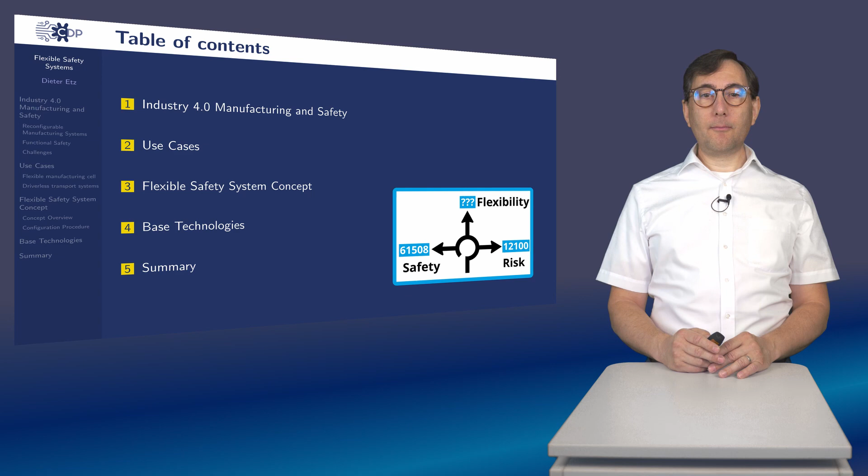Now let's have a look at Industry 4.0 manufacturing and why safety needs particular attention in this context. There are several requirements on machinery used for Industry 4.0 manufacturing. First, the idea of Industry 4.0 manufacturing is customized mass production, or lot size 1 production, which means single piece production with the cost of mass production.

Then you need a flexible change of configuration, including hardware as well as software. Also, rapid change of process and product configuration is important in order to minimize setup time.

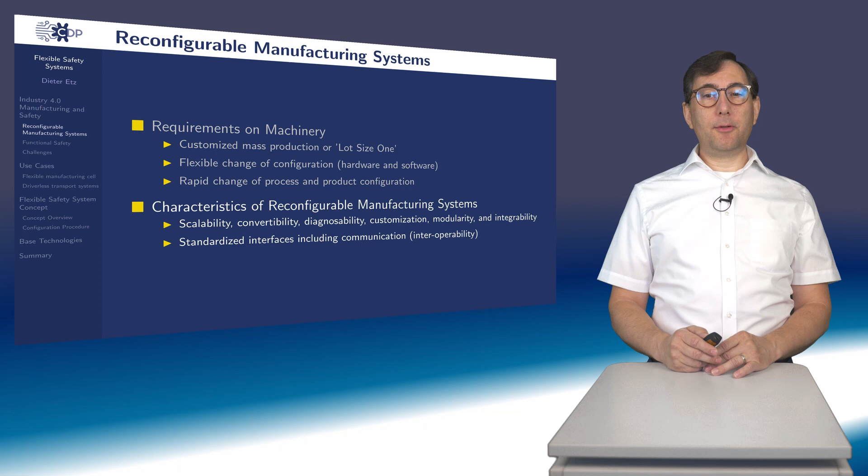Now let's come to reconfigurable manufacturing systems. This type of manufacturing system was already introduced in the 1990s, and with the emergence of Industry 4.0 manufacturing, reconfigurable manufacturing systems are experiencing a renaissance. These systems are characterized by scalability, convertibility, diagnosability, customization, modularity, and integrability.

Also, an important aspect is standardized interfaces, including communication. This addresses the need for interoperability among machinery. Now let me jump to a very different and also very important topic in industrial machinery: safety.

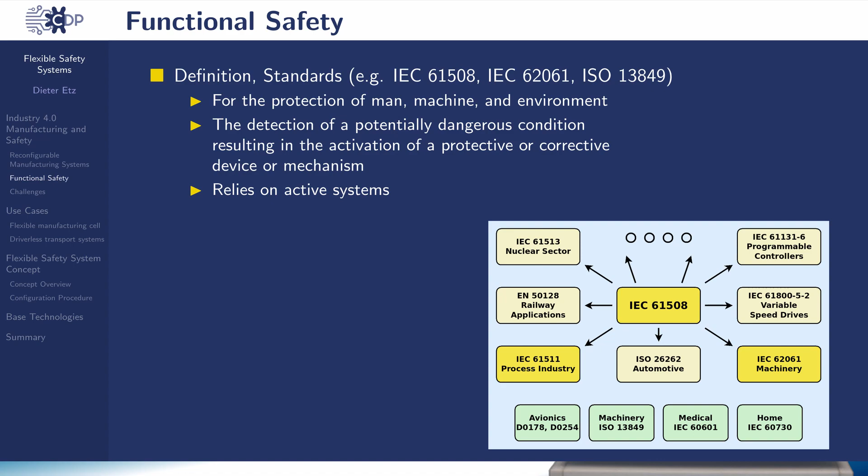There are certain standards for safety, such as IEC 61508, which is a generic base standard for other sector-specific safety standards, such as IEC 62061, which deals with machinery.

Safety is defined for the protection of man, machine, and environment. Functional safety is the detection of a potentially dangerous condition resulting in the activation of a protective or corrective device or mechanism, and it relies on an active system. It therefore differs from a passive system, such as a fence.

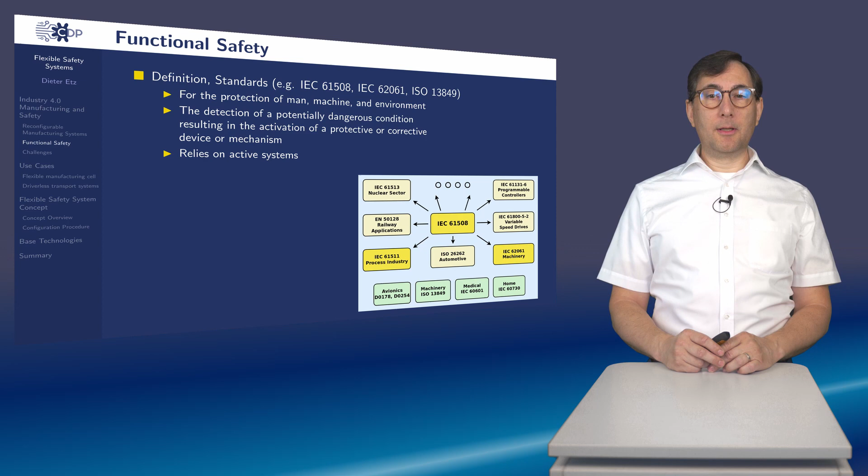There are many reasons for implementing safety measures in industrial machinery, and one of them is regulation. There are different kinds of regulation, such as administrative law. Administrative law deals with consequences without suffering any damage, and an example would be the European Union's Machinery Directive, which is in short time becoming a regulation.

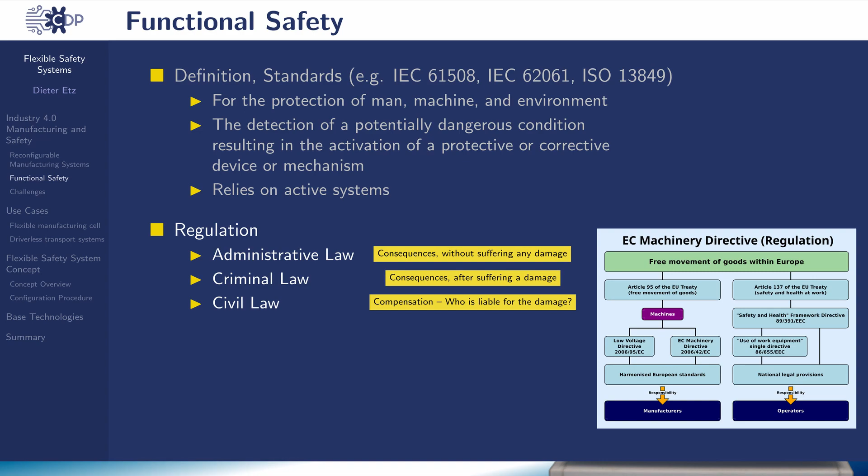This regulation defines responsibilities of the machine manufacturer and the machine operator. It means that a machine manufacturer has to design and engineer a safe machine. On the other hand, the operator of this machine has to take care of safe operation of this machinery.

Another regulation is criminal law, which deals with the consequences after suffering a damage. And there's also civil law, which deals with compensation, meaning who is actually liable for the damage.

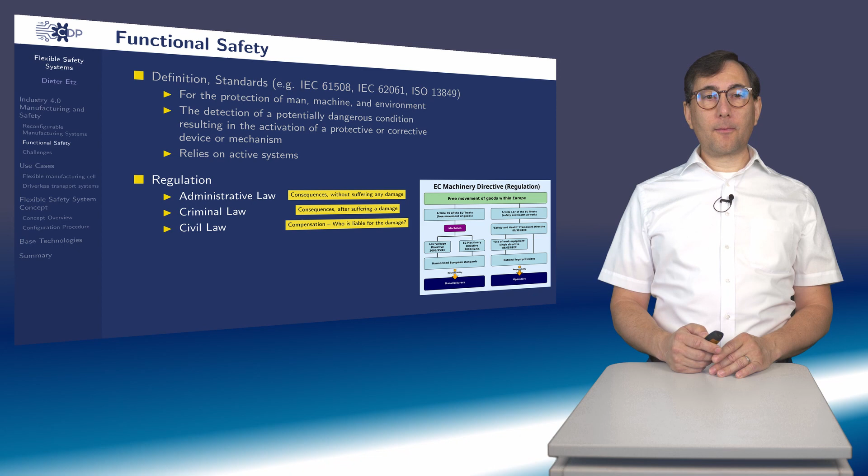Now let me come to the so-called overall safety life cycle. These life cycles are adopted by several safety standards, and they provide a systematic way of all activity necessary in order to achieve safety certification. It therefore provides a framework to achieve the required safety integrity level.

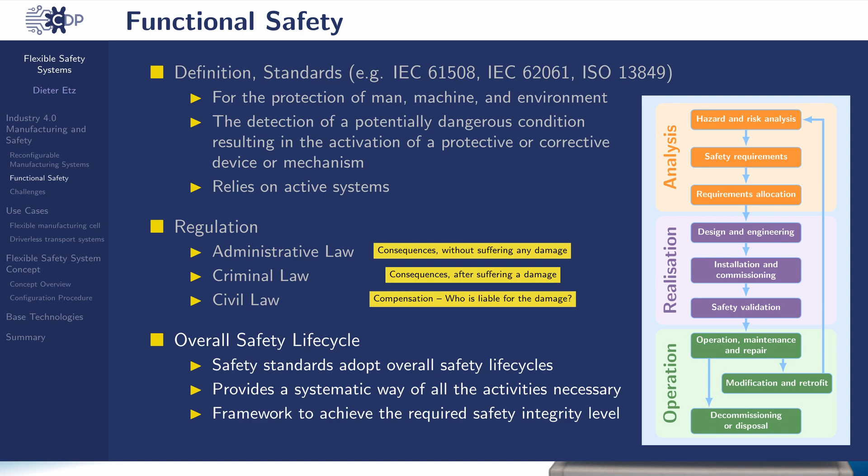This brings us to the challenges of flexible machinery in Industry 4.0 manufacturing. So what are the challenges? First of all, the reconfiguration of machinery, including the safety configuration.

The operator of the machinery wants to have quick, simple and safe reconfiguration. And this reconfiguration depends on the product or on the process. Change requests therefore can originate from a human operator as well as from an orchestration system.

Today, this reconfiguration of safety is not really existing. There is only a way that you can use an operation mode selector to switch between a number of safety configurations, but it's not as flexible as the operator wants to have it.

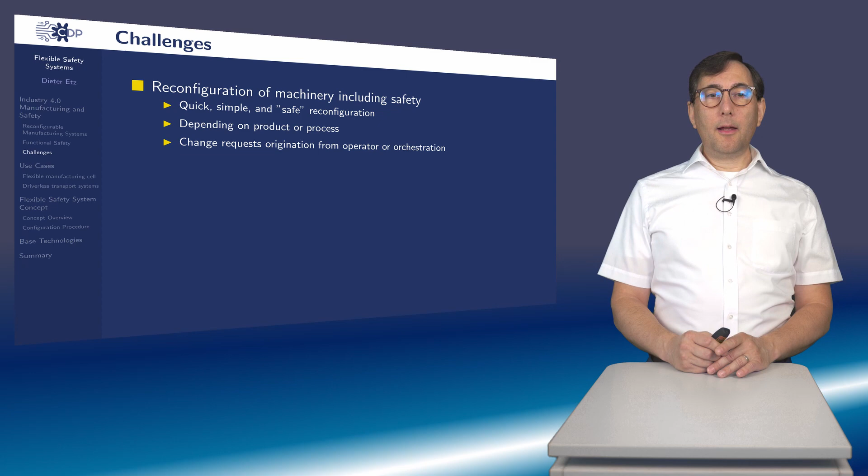Another challenge is the high degree of complexity of these many configurations. This is due to the high degree of flexibility and customization of the machinery, and also due to the rapid rearrangement of modules of machinery. This includes hardware as well as software modules, and in our case also safety devices and safety configuration. There are many layers of configuration in that context - hardware, product, process or safety - which have to be reconfigured at the same time.

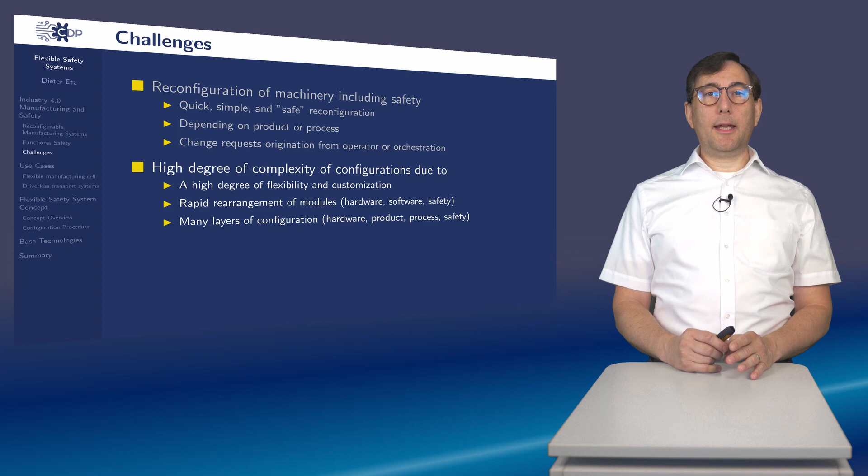Therefore, an assistance system is mandatory in order to provide rapid and safe reconfiguration for the operator. This means the operator will be enabled for quick reconfiguration even during operation, for the reduction of the operator's workload and for increased safety. Such an assistance system becomes mandatory, also to avoid careless mistakes when doing quick reconfiguration of the system.

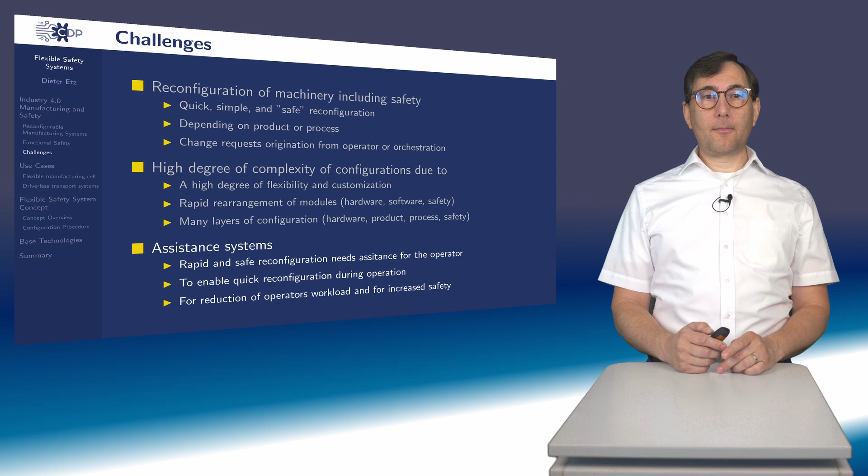So let me come now to use cases for an easier understanding of the topic. I provided two use cases which will show the need for flexibility in safety in machinery.

The first use case is a flexible manufacturing cell or a flexible manufacturing line. The purpose here is a quick and simple switching between production configurations - you have a flexible manufacturing cell, and this cell is operated in a different way depending on the shift, for example. In early shift, you're using it in a manual way. The late shift has a mixed operation mode between manual and automatic, and the night shift is running fully automatic.

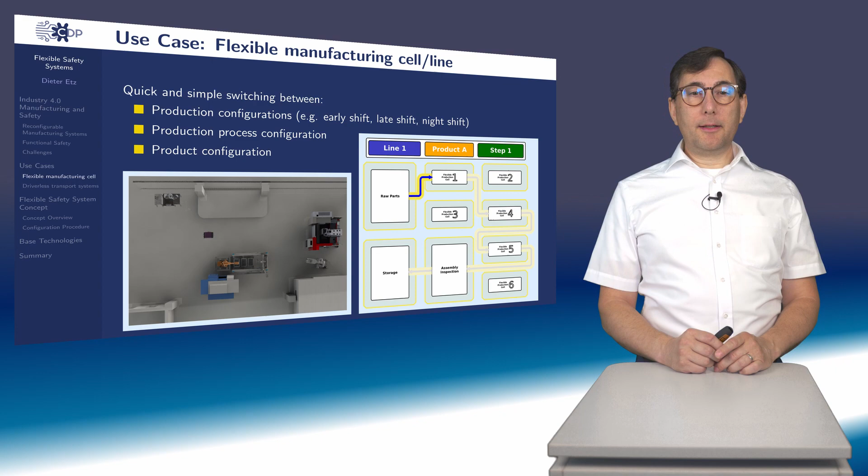There is also the need for quick and simple switching between production process configuration and product configuration. As you can see on the right graphics, in the flexible manufacturing line, which consists of many flexible manufacturing cells, the process can change due to a failure of one of the machines. This means the orchestration system can automatically switch to a different path through the line, which also includes the safety configuration.

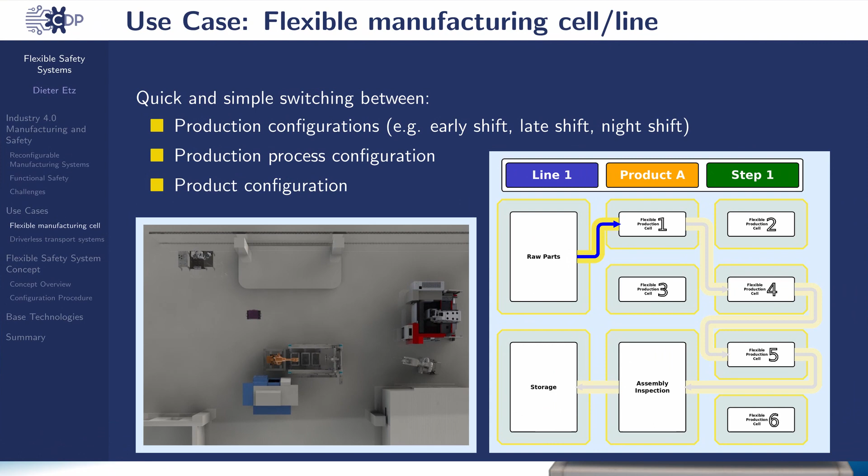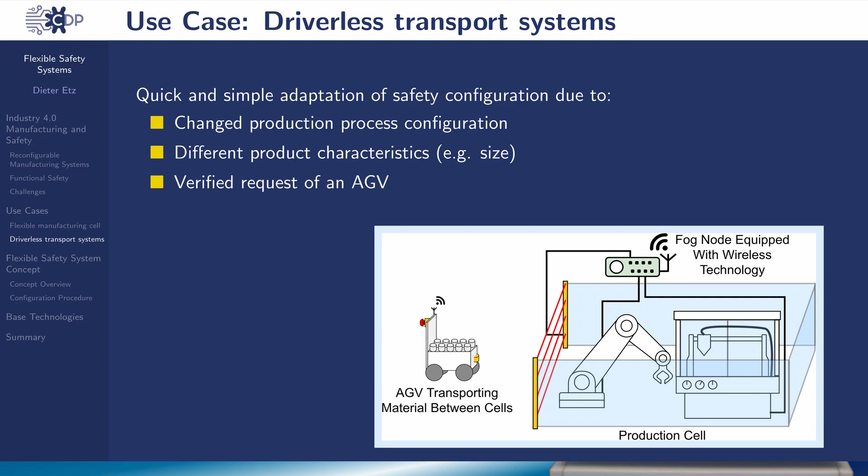The second use case is the case of a driverless transport system. In that case, quick, simple adaptation of safety configuration is necessary due to changed production process configuration, due to different product characteristics - for instance, the size of the workpiece - or through a verified request of an automated guided vehicle.

In the graphics, you can see an automated guided vehicle which arrives at a production cell, which is protected by a light fence. After a request from the AGV to the production cell, this light fence is opened up for the AGV in order to pass into the production cell. After passing through, the light fence is activated again.

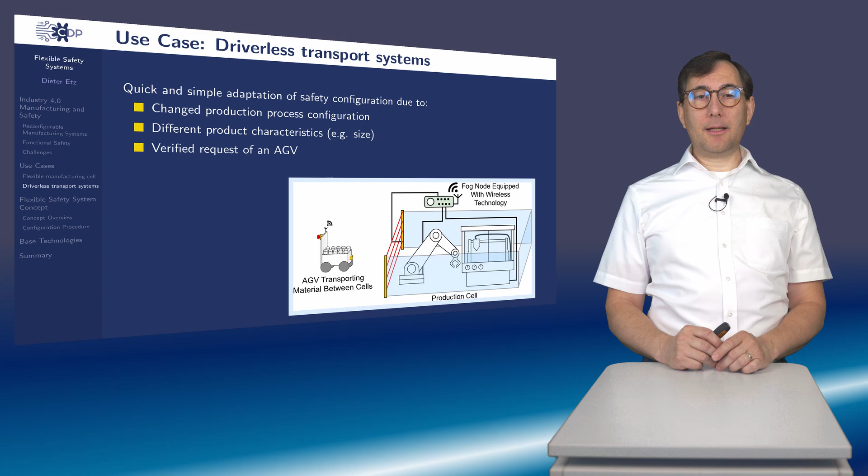Now let me come to the concepts and the idea of flexible safety systems and why this flexible safety system is important for the just mentioned use cases. First, let me give you a concept overview.

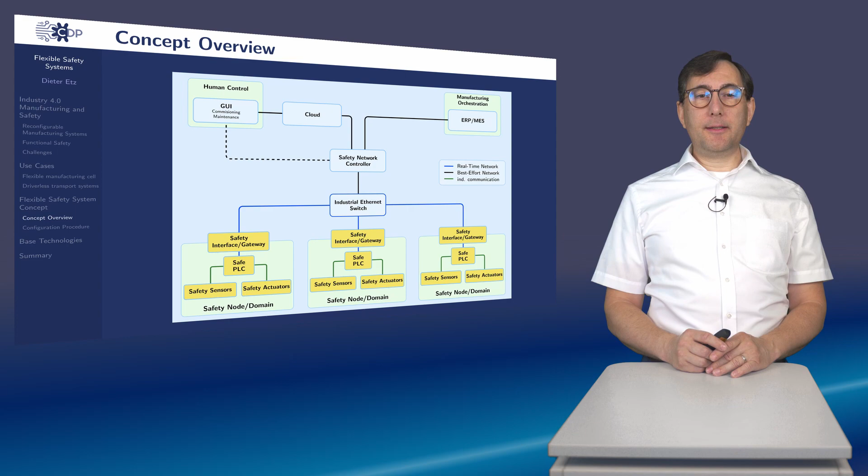On this picture you can see on the bottom 3 different safety nodes or safety domains with safety equipment. These safety nodes are connected with an industrial Ethernet network, and each of these nodes has a safety interface or a safety gateway, which means these safety domains are connected via industrial Ethernet and also with a safety communication platform. On top of that, you can see a safety network controller - this is basically the heart of the system.

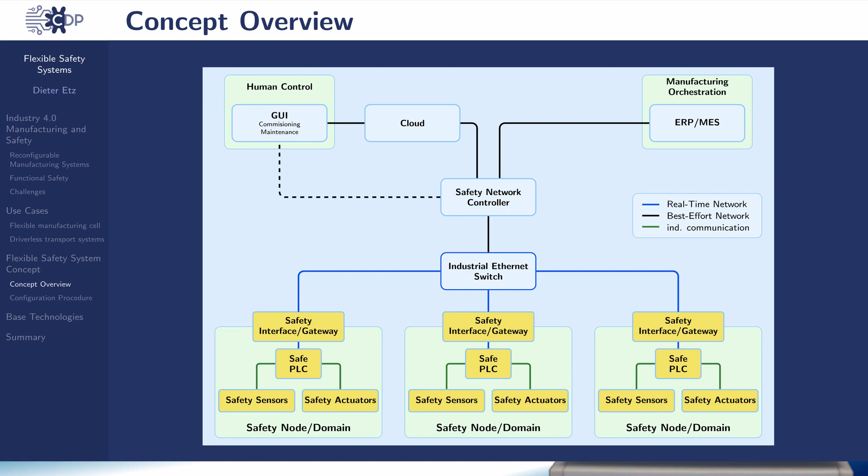On the one hand, it takes over all the activities needed for network and safety configuration. At the same time, it works as an assistance system for the operator, in that on the top left-hand side you can see the human control interface, which is basically a graphical user interface, directly or via a cloud application connected to the safety network controller. On the right-hand side, you can see a manufacturing orchestration, which can be an ERP or MES system, which can also send requests to the safety network controller in order to change the safety configuration of the whole network.

Not only the devices, but also the network topology, how these devices are connected with each other.

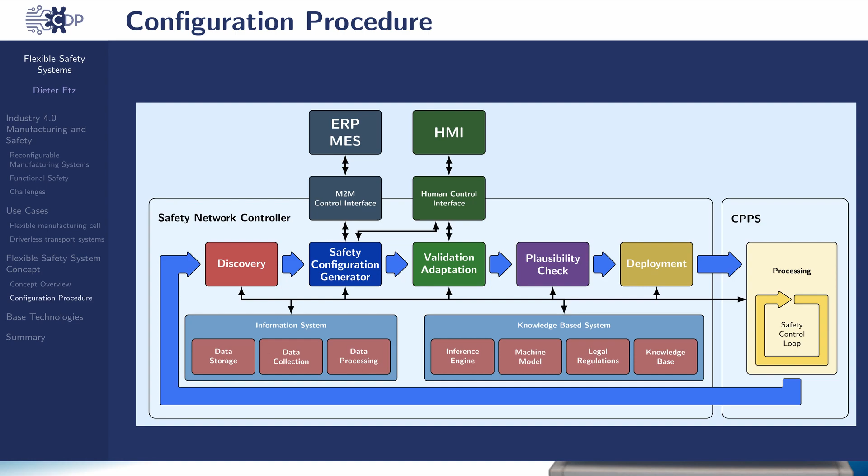In the next step, if this check is passed, there is an automatic deployment which takes care that all the different parts of configuration are deployed into the hardware system. This means all this deployment phase is connecting to all devices within the cyber physical production system and deploys all parts of the configuration in the correct way.

What you also can see in this graphics of the safety network controller is a machine-to-machine control interface. This is for connecting an ERP or MES system to this controller, which means the ERP or MES system can demand a specific safety configuration to be deployed into the machinery.

At the bottom, you can see some necessary parts of the system, such as an information system, which is basically for data storage and data processing. On the right-hand side, you can see also a knowledge base where all the information of the system is being stored. And there is also, for future use, legal regulation stored in this knowledge base in order to be able to check if a safety configuration complies to certain legal standards or legal regulations.

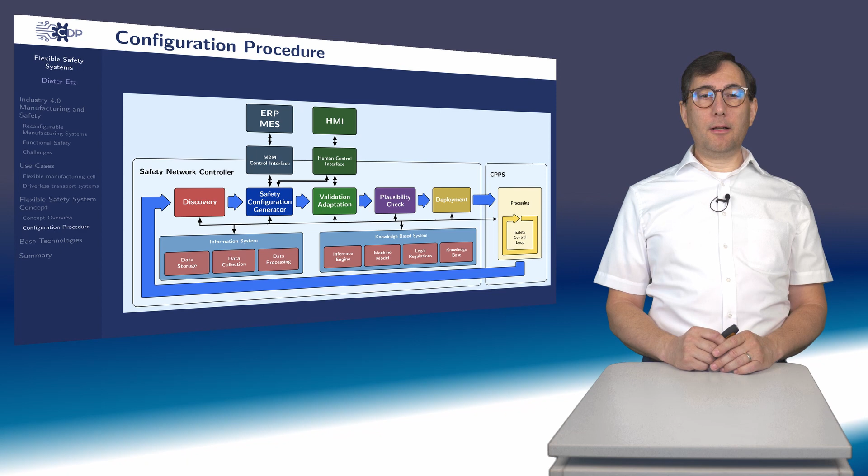Now let's have a look at the base technologies which are used in order to make this flexible safety system possible.

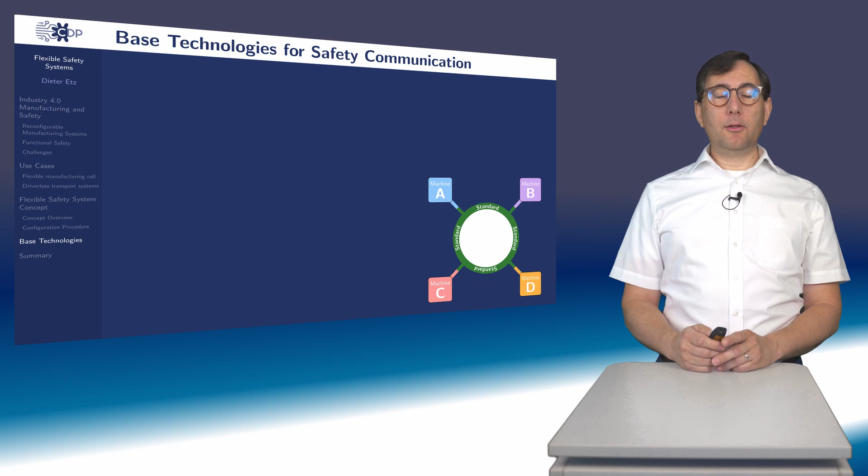First, and I mentioned that already at the beginning, interoperability is one of the main aspects of safety communication within an Industry 4.0 manufacturing system. Here you can see there are four different machines from different vendors. And the idea is to use standardized communication in order to connect all this machinery.

The first building block in that context is time-sensitive networking. This technology is a deterministic communication platform based on IEEE 802.3 Ethernet, and it provides time synchronization, traffic scheduling, and system configuration among other features. Basically, it's a converged network with critical and non-critical data traffic, and it's a vendor-neutral IEEE standard.

The second building block is OPC-UA, which is an industrial communication standard. It's platform independent, so it can be implemented from a small embedded system up to a cloud solution. And OPC-UA provides an extensible design, which means a manufacturer can extend the existing OPC-UA standards with UA companion specifications.

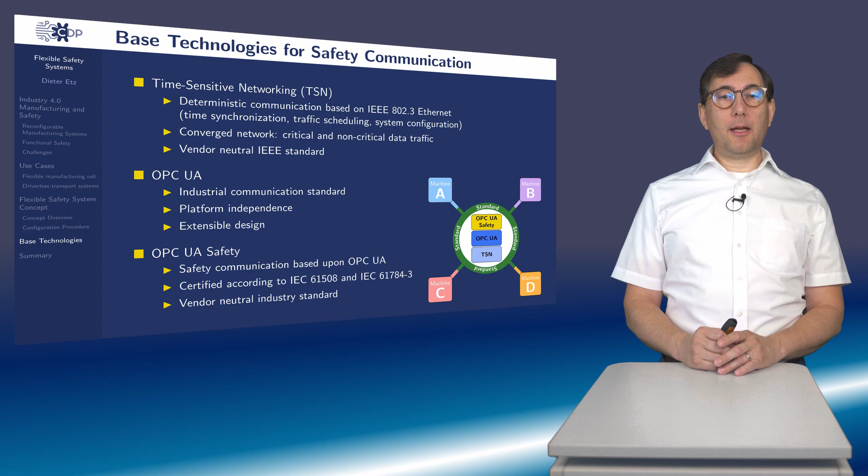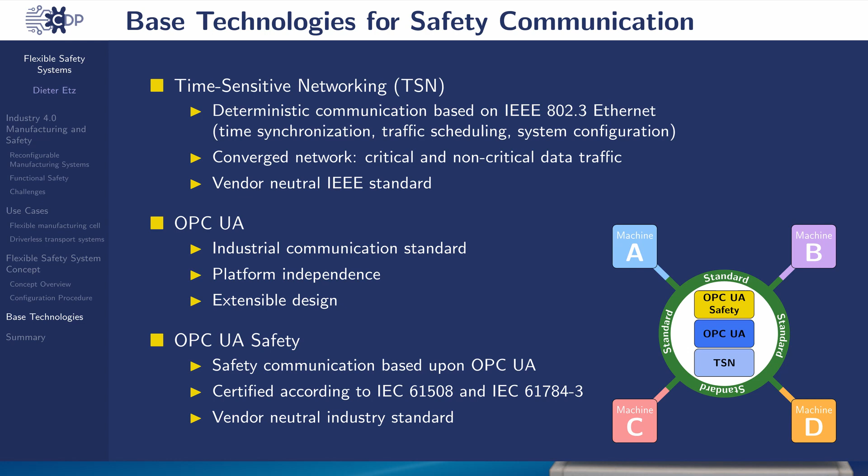The third building block for safety communication is OPC-UA Safety. This is safety communication based upon OPC-UA. It's certified according to IEC 61508, and it's also a vendor-neutral industry standard.

So this brings us directly to the summary of the presentation. First, we were talking about Industry 4.0 and reconfigurable manufacturing systems and the challenges with safety. The main points there were quick, simple and safe reconfiguration, and that an assistance system is needed in order to operate such complex systems. Then I presented two use cases, one with the flexible manufacturing cells and manufacturing lines, and the second use case about driverless transport systems.

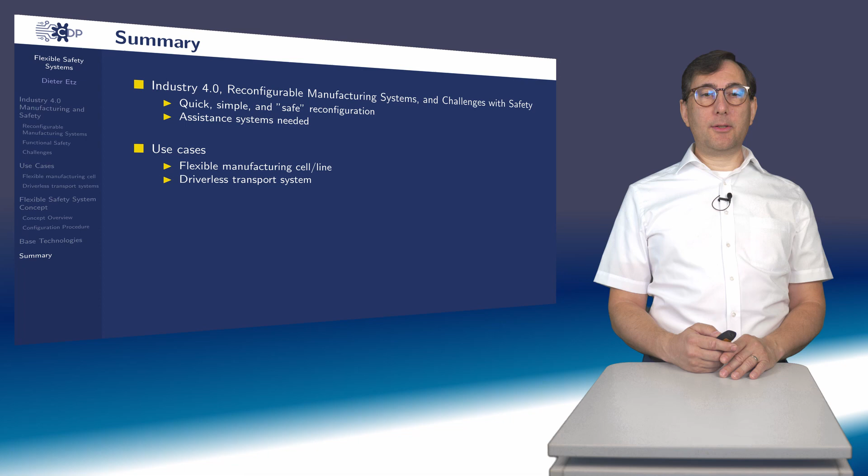After that, I showed the concepts of flexible safety system with an overview and with the configuration procedure. And at last, we mentioned the base technologies used for flexible safety systems, and that it's a standardized safety communication platform which addresses the need for interoperability in an Industry 4.0 manufacturing system. These base technologies were time-sensitive networking, OPC-UA, and OPC-UA Safety.

In the next part of this webinar series, the base technologies will be explained in more detail. Attention will be focused on how to realize vendor-neutral, standardized and certified safety communication in order to enable interoperability among machines from various manufacturers.